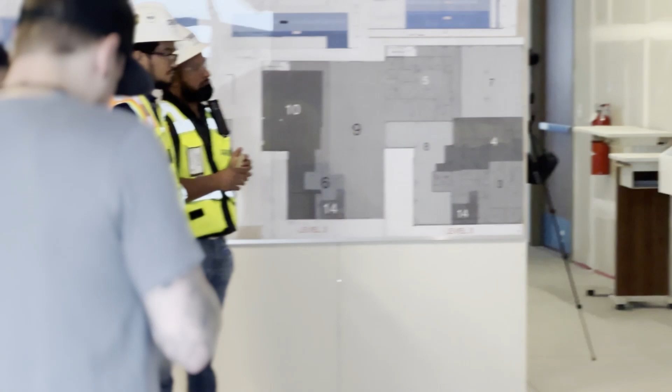First, an introduction to takt planning. We'll briefly define what it is and why it could be a game changer. Next, we'll explore how we've integrated takt planning with our existing lean systems. We'll talk about tweaking our pull planning to integrate leveling and how we've modified our weekly whiteboard boards to better sync with takt. Then we'll get into the meat of the project outcome: what benefits did we see, what lessons did we learn and pick up along the way. We'll also wrap it up with a conclusion that'll tie everything together and emphasize the real takeaway here, the ongoing journey of lean innovation.

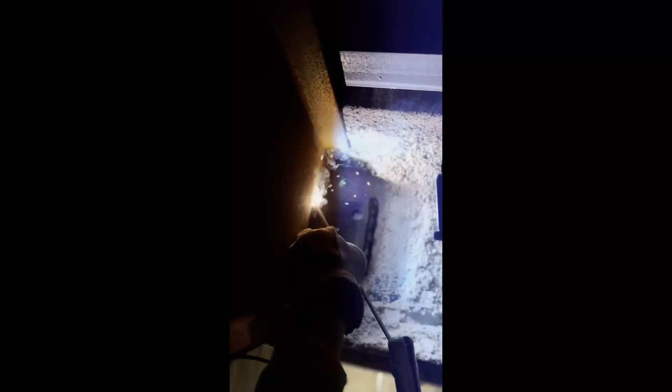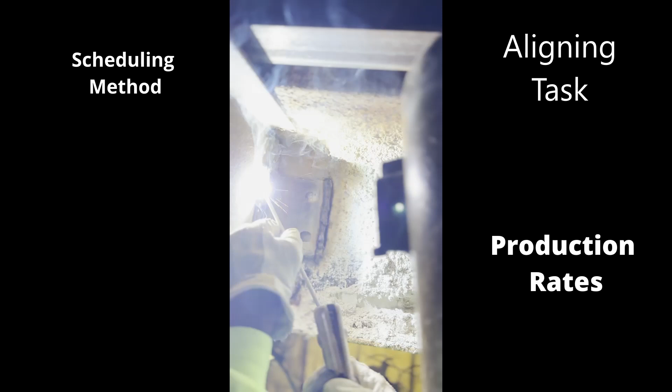First, takt planning. Now, what is takt planning? I'm going to give you a brief description. It's a construction scheduling method borrowed from the world of manufacturing. The idea is to balance work across the board by aligning tasks with consistent production rates, also known as takt time. By doing this, we make sure each construction phase is in sync, reducing downtime and wasted resources.

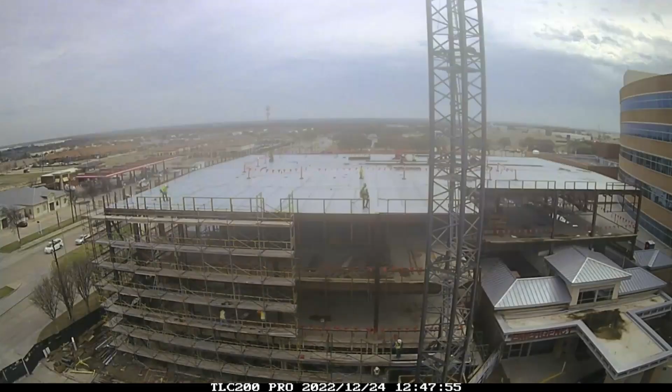Why is takt planning so critical in construction? The idea is it could take the chaos out of the equation. We've all been on projects where things are frantic, people are running around, and you're always playing catch up. With takt planning, the idea is to help align everyone from the trade partners to the suppliers, making sure we're all on the same page. When that happens, we can deliver a better, faster project with fewer hiccups along the way.

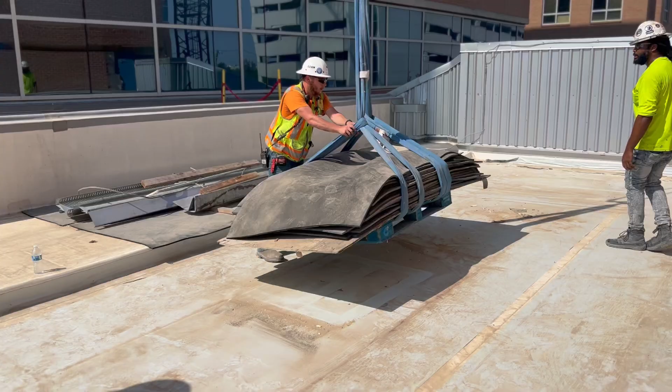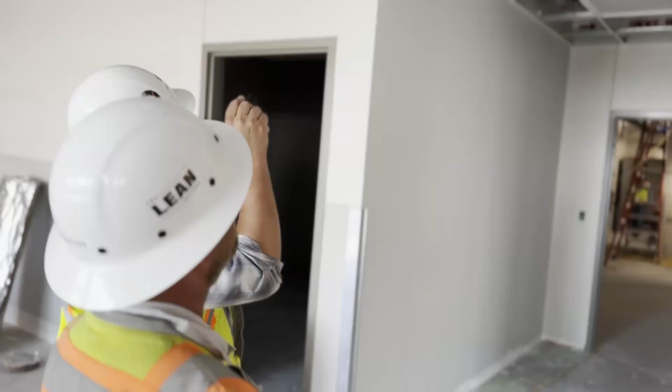Here at Skiles Group, lean practices are in our blood. Integrating takt planning into our existing system posed an interesting challenge. It wasn't a rip it up and start over situation, but rather finding that missing puzzle piece. Did we get it perfect right out of the gate? No. But that's not the point. Lean is all about continuous improvement. Takt planning gave us a unique opportunity to level up. It's been an insightful journey, and that's what we're going to unpack next.

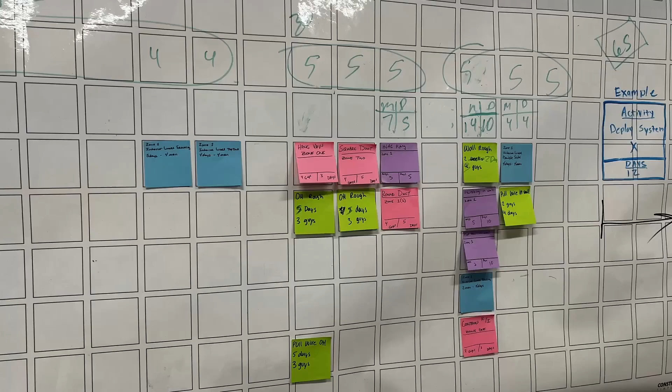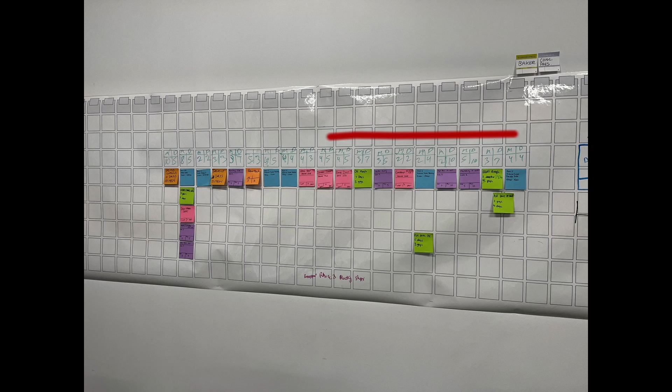Adjusting the pull plan for leveling integration. Pull planning is one of the cornerstones of lean practices here at Skiles Group. If you're not familiar, a quick rundown of what this is: we invite trade partners to meet prepared and ready, having studied the blueprints and the scope and duration of their work. Then they fill out cards that pull activities in reverse order, from the final coat of paint all the way back to starting grading in the dirt. We don't do this for the whole project at once, but we break it down into manageable milestones. Trade partners put up their cards in a sequence, working backward from the end goal to the starting point.

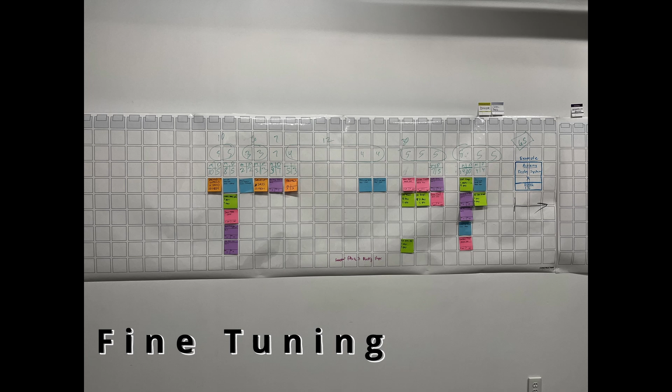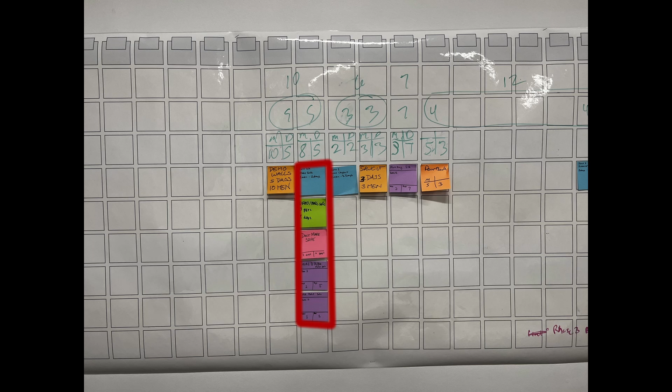Now, adding takt planning to this tried and true method requires some fine tuning. It wasn't perfect the first time, but it's all about the learning process. We found that the leveling system is where the real innovation comes in. We identify activities that can be done simultaneously, think overhead MEP systems. These are bundled together into what we call a work package.

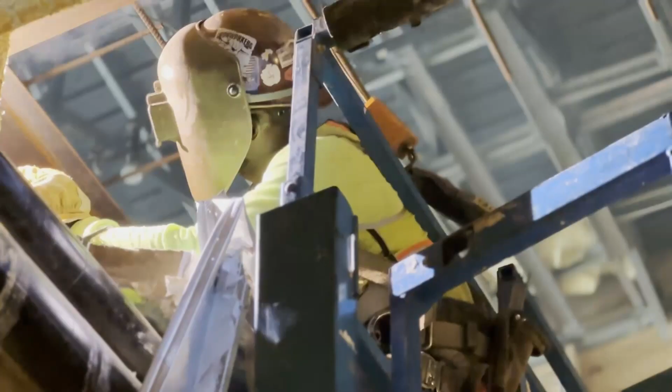Based on these packages, we determine the takt time, which could be 3, 4, or 5 days. Then we sit down with those trades involved in each package and we align on the days and the resources needed. This has added a whole new layer of depth to our planning, especially when it comes to precision around handoffs between trades. That's an area where we see ample room for improvement, and we'll dive deeper into that towards the end of the video.

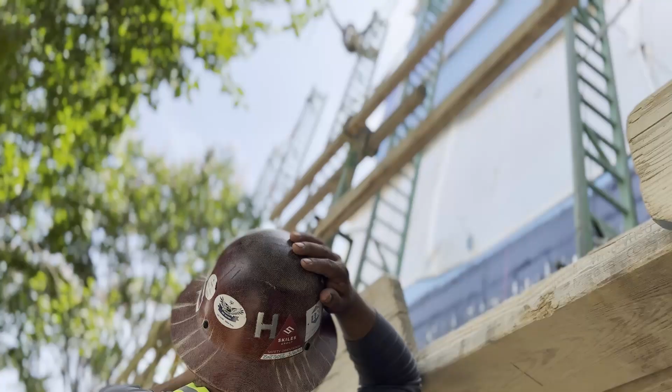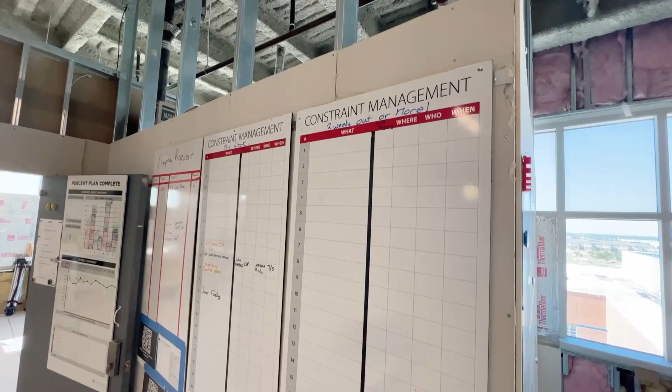Modifying our lean wipe down boards for better takt system integration. Another key aspect of our lean approach is our weekly wipe down meetings. If you're not familiar, here's a quick snapshot. We meet once a week for about an hour to go over a couple key things. First, we score our completion task for that past week. We calculate out the percentage of the plan complete.

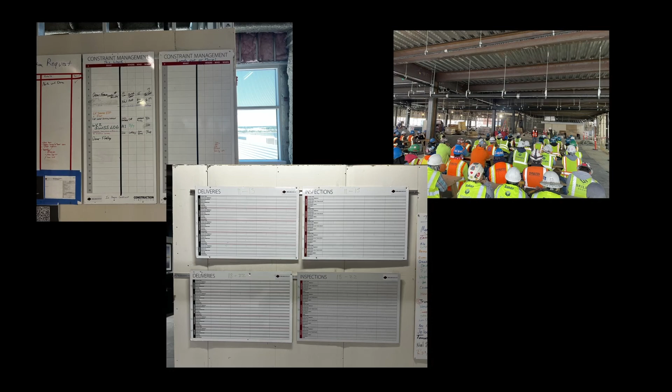Then we look ahead to the next 3 weeks to plan out our activities, constraints, safety topics, and upcoming deliveries and inspections. This isn't just a general huddle, it's a focused session where our last planners give us a granular look at the next week's activities.

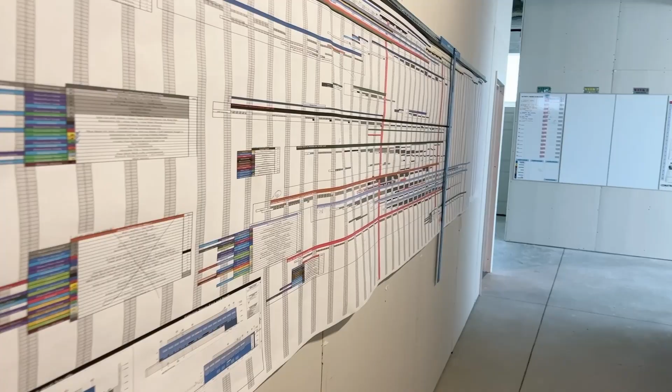So when it came to adapting our weekly wipe down meetings for takt, we focused primarily on the board structure. Originally, these boards were designed around CPM planning methods, as outlined in the Lean Builder Book. But takt planning has a different structure, so we needed to modify the boards to match.

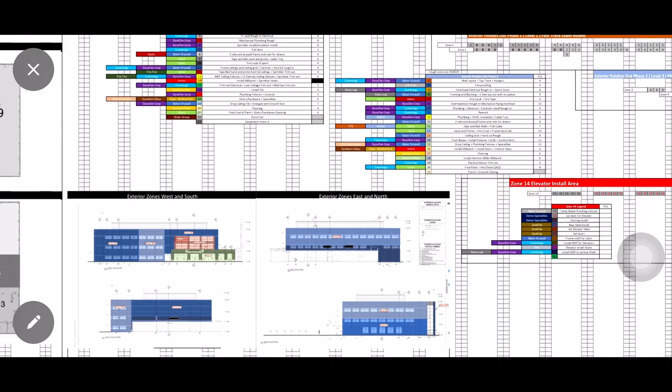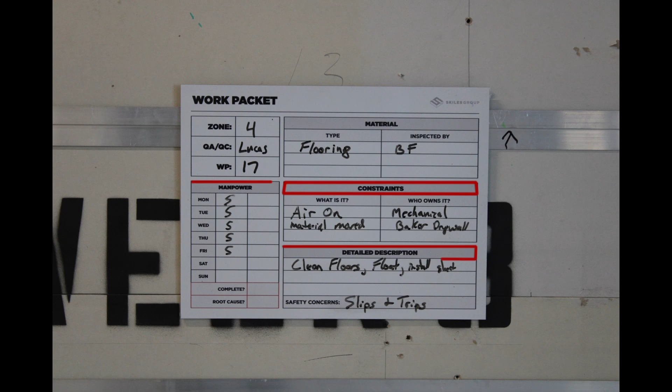We rearranged them to go vertically, 1 week at the top, followed by the second week and the third week at the bottom. Think of each board as a takt wagon, capturing all the constraints, details, manpower for the week's activities. Then, just like our traditional meetings, we could score those specifics. This way, our board system now aligns seamlessly with the takt planning, making our meetings more efficient and more focused.

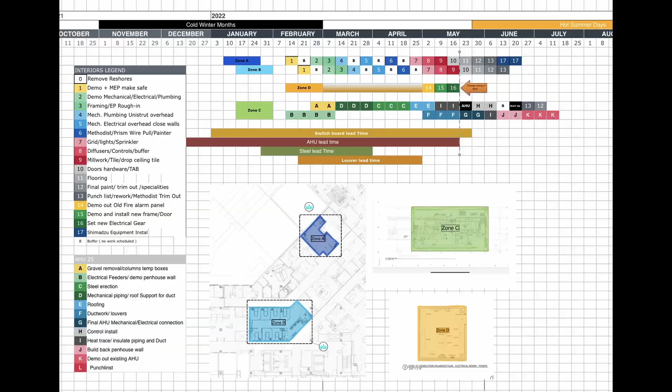Benefits realized. So what did we actually gain from diving into takt planning? First of all, the new leveling adoption to the pull planning was really an eye-opener. It offered us a unique way to structure our schedules, helping us to understand which activities can be paired and which can't. Plus, the ability to align manpower with square footage in a project also has contributed to our knowledge.

But don't overlook the wipe down cards. Before, we'd have to rework those boards every week. Now, if we stick to the plan, those cards don't change. That's been a massive time saver. And the clincher, multiple trades now can update their boards simultaneously.

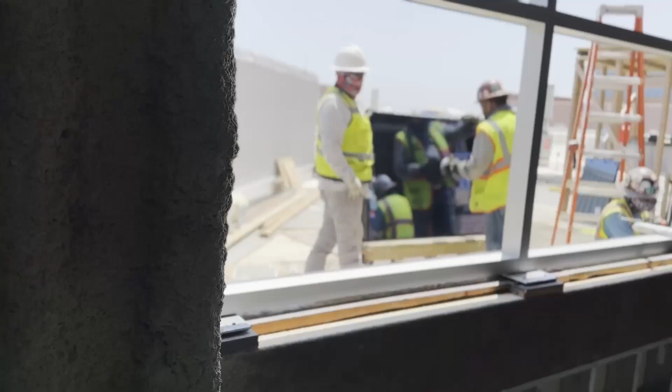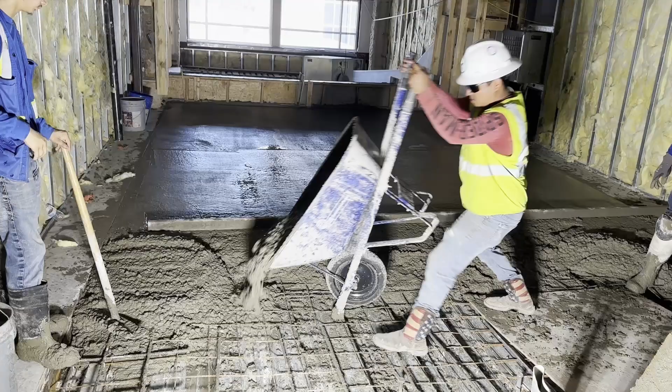Lessons learned. So what are our lessons learned? First off, we now grasp how critical handoffs are between activities, something we honestly underestimated in our initial foray into takt planning. There are instances where tasks spilling over into other zones created a bit of chaos. Sure, we adapted, but going forward, we're zeroing in on these handoffs.

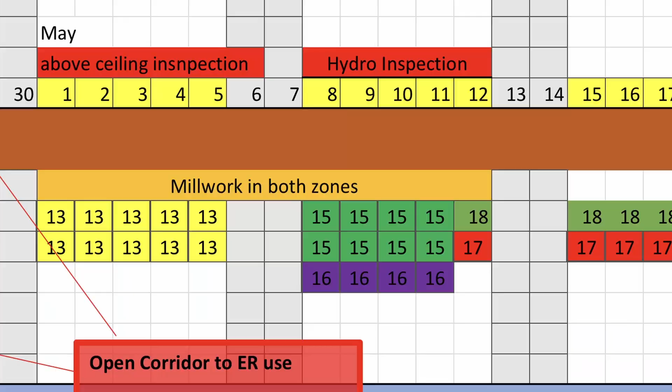The second lesson involves work packets. takt planning gives us this great flexibility to adapt within the takt time, but we realized we needed to get more specific. Some activities within the work packet need individual attention, especially when you're trying to align every cog in the machine.

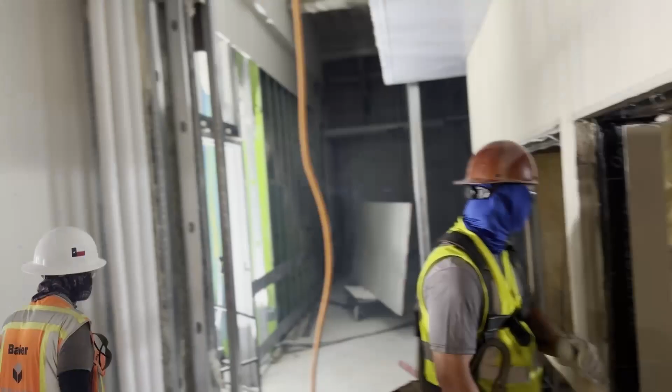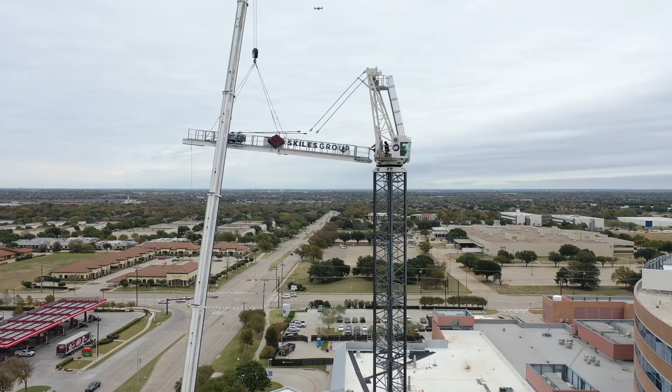In conclusion, so what's the big takeaway from diving into takt planning on a project as complex as ours? First, takt planning isn't a one-size-fits-all. It's flexible enough to tackle a wide range of projects. I mean, look at this one. Shell spaces, lab, pharmacy, interior renovation, MEP systems that stretched across the campus, and the list goes on. No two sections of this building were alike, yet the takt planning held its ground.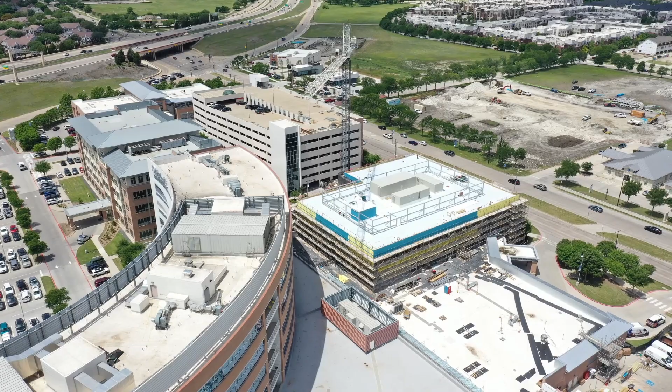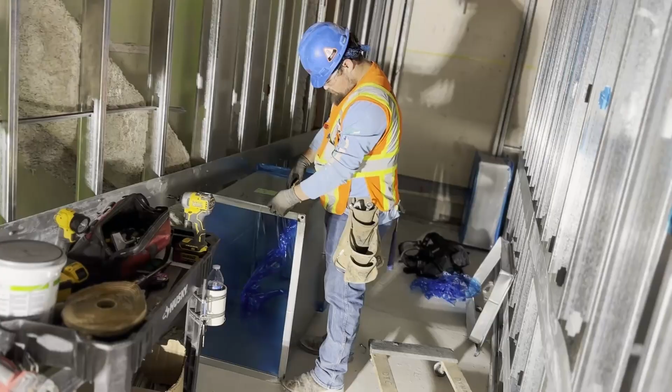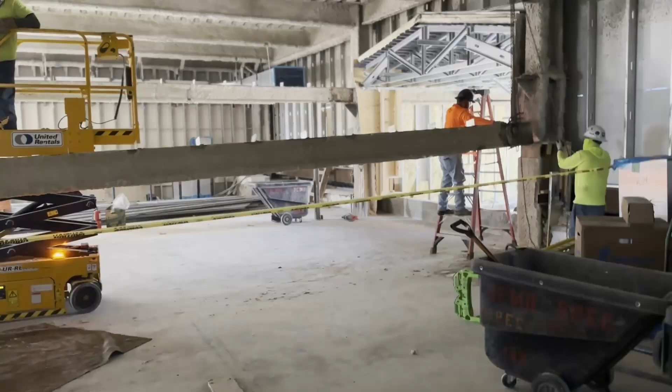But let us not forget what is at the core of this entire video: the spirit of continuous improvement. That's at the heart of everything lean. Whether you're a lean rookie or you're a seasoned pro like us here at Skiles Group, the focus should always be on the journey, not just hitting some imaginary finish line. We're all about tweaking, refining, pushing the boundaries of every lean method we adopt. Because in the end, it's not about takt planning experience, it's about our relentless pursuit of doing things better.